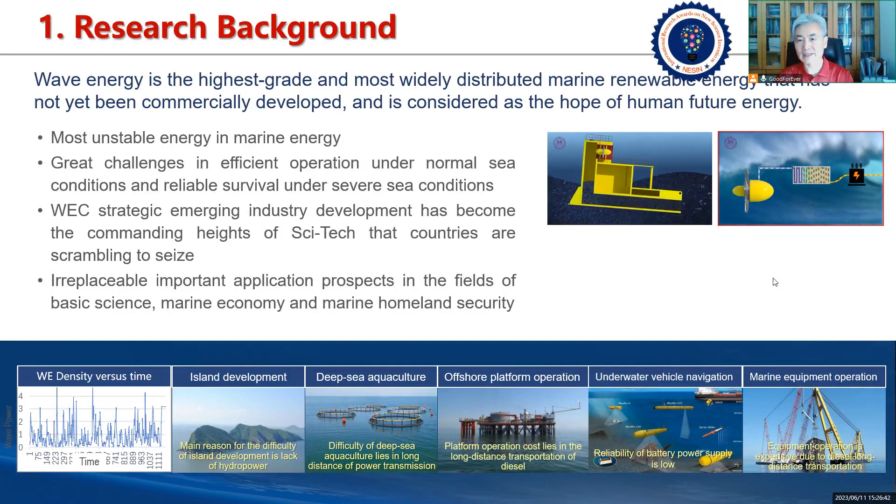The wave energy conversion system faces great challenges in efficient operation under normal sea conditions and reliable survival under severe sea conditions. The development of its strategic emerging industries has become the commanding heights of science and technology that coastal countries are scrambling to seize. It has irreplaceable important application prospects in the fields of basic science, marine economy, and marine homeland security.

The research on wave energy power generation technology has a history of nearly 100 years. Especially in the past 30 years, wave energy utilization technology has rapidly developed, and hundreds of structure types of wave energy conversion devices have been presented. These devices have been applied for grid connection or independent power generation. Here are the 12 most representative wave energy conversion devices in the world.

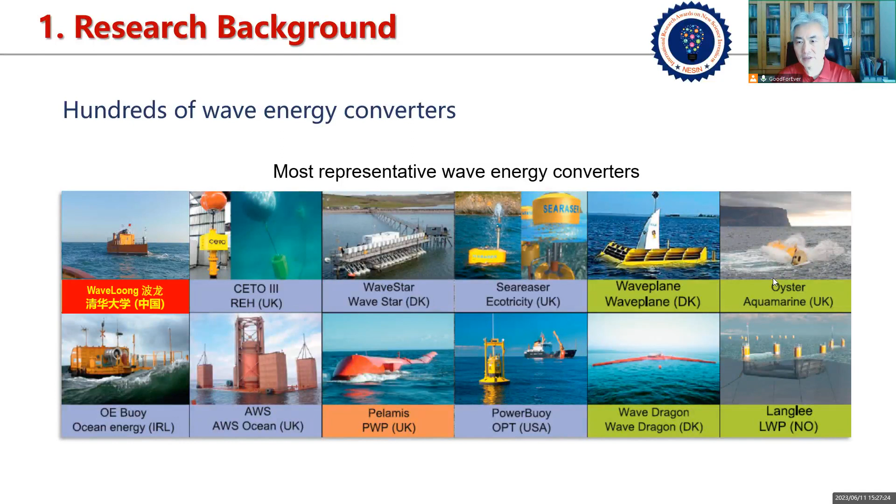These devices, according to their structure types, are mainly divided into oscillating water column type, point absorption type, pendulum type, raft type, and pressure difference type wave energy conversion devices. According to their energy transmission mode, they can be divided into pneumatic transmission and hydraulic transmission.

At present, wave energy power generation technology is still an emerging technology, and its main development trends are divided into two categories: pneumatic transmission and hydraulic transmission technology. Hydraulic transmission technology uses relative motion between the floating bodies and the supporting platforms to achieve wave energy conversion, which means that the devices are composed of at least two or more structural bodies, with large scale, high ocean engineering costs, high implementation difficulty, and poor reliability.

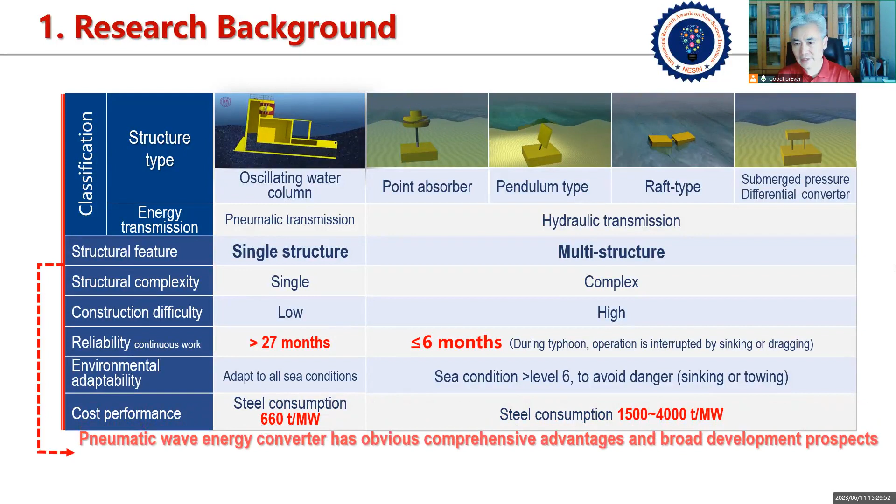This single floating device has been operating stably at sea for more than 2 years and has withstood the test of large waves, and its cost effectiveness is significantly higher than that of multi-structure devices. Therefore, the pneumatic wave energy converter has obvious comprehensive advantages and broad development prospects.

For the backward bent duct buoy oscillating water column pneumatic wave energy generation device, a fully coupled model theory from waves to electricity has not been established so far, making the mechanism of fluid-solid mechanical-electric interaction in the device unclear. Additionally, the efficiency of the air turbine in the device is not high enough and the survivability is not strong enough. These will be the problems we need to solve.

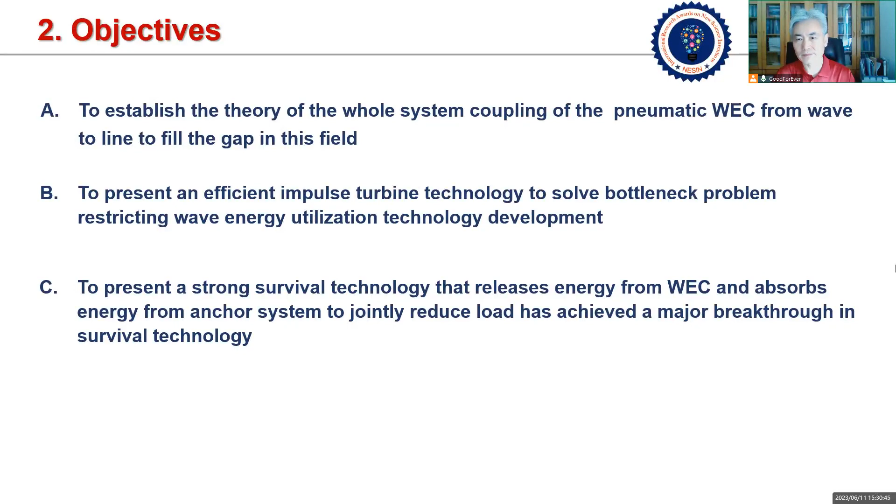3. Theory development for pneumatic wave energy converter. In response to the problems of frequent extreme typhoons, poor sea conditions, low wave frequencies, and large fluctuations, existing models are difficult to accurately simulate this kind of problem. The simulated results using the existing model will differ by up to 100% from the actual measured ones.

The common equations for fluid, structure, turbine, and generator motion are used to develop a fully coupled model of the backward bent duct buoy pneumatic wave energy conversion system from wave to electricity, to make up for the significant deficiencies in the theoretical errors of existing models, and to clarify the mechanism of fluid-solid mechanical-electric interaction in the entire system from waves to electricity.

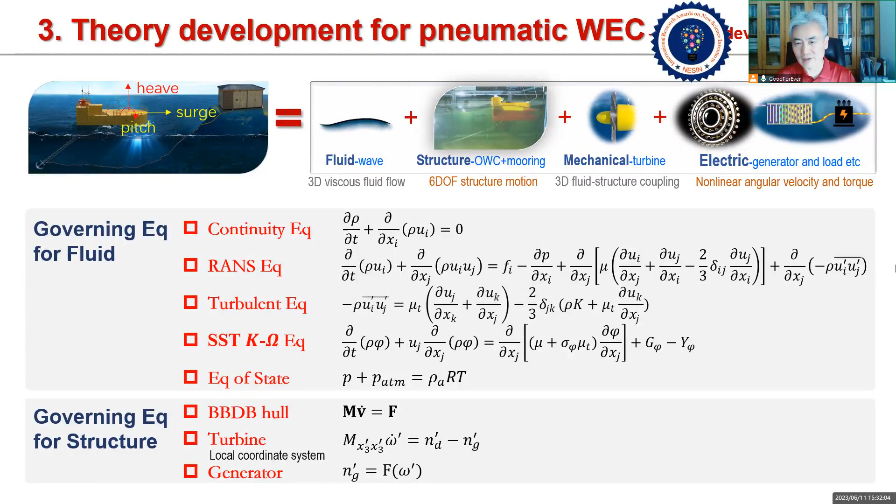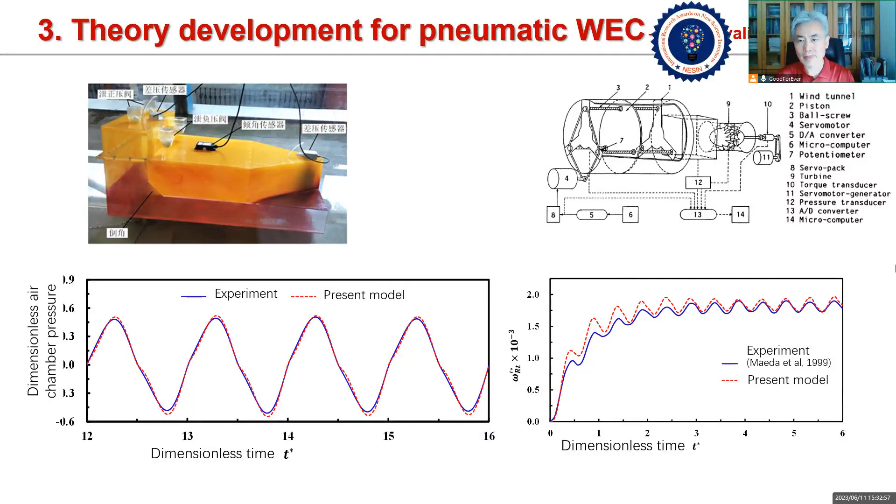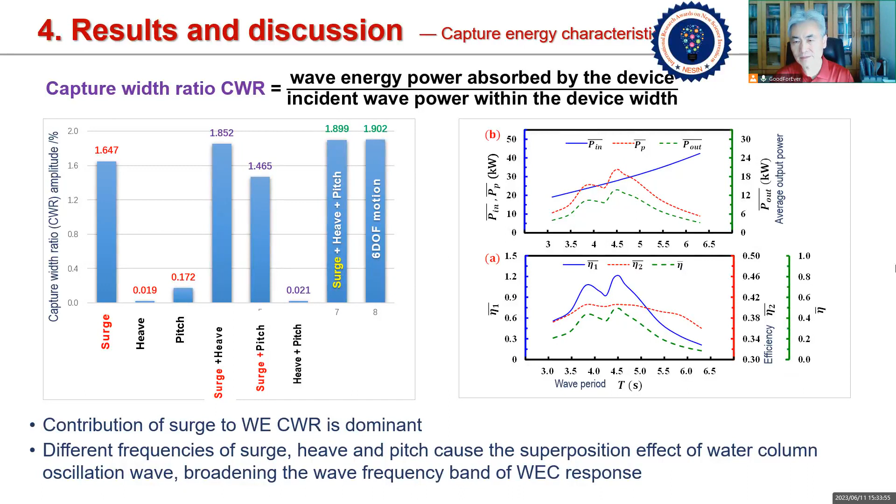The right-down figure shows the variation of the capture width ratio, turbine efficiency, and total device efficiency with wave period, which shows bimodal phenomena and the device's response, the wave frequency band becomes wider. Due to the difficulty in further improving the capture width ratio of the existing backward bent duct buoy oscillating water column pneumatic wave energy converter, bottom water pressure plate and ductile guide plate technologies are proposed.

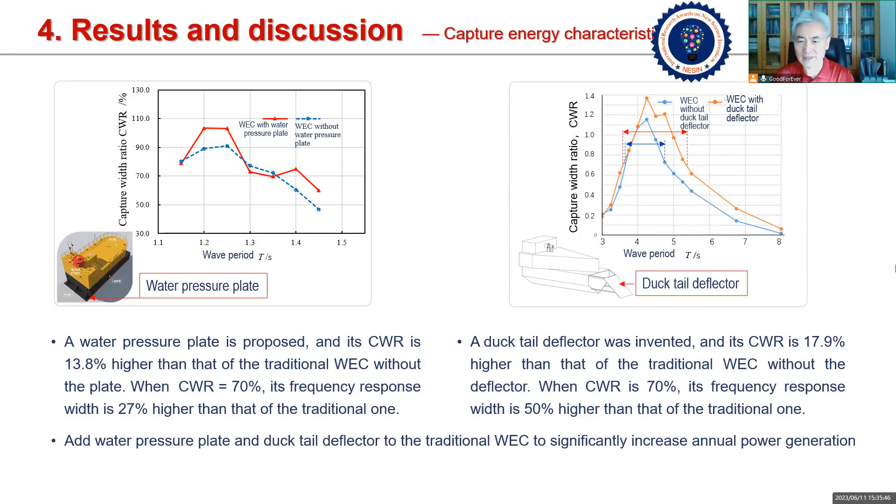that of the traditional one. The right figure shows the variation of capture width ratio with the period for the device equipped with a duck tail deflector. The capture width ratio of this proposed device with a duck tail deflector is increased by 17% compared to the traditional one. And when the capture width ratio is equal to 70%, the frequency response width of the proposed device is increased by 50% compared to the traditional one. The addition of water pressure plates and duck tail deflectors implies that the device can significantly increase annual power generation.

In order to effectively reduce the aerodynamic energy loss at the downstream row of guide wings, an impulse air turbine with fixed U-shaped flow channels and dual radial flow was invented, with an efficiency of 66%. The numerical results of transient simulation of the U-shaped impulse air turbine indicate the pressure and flow rate do not meet the quadratic relationship of existing theories, and the existing steady-state design theory overestimates the turbine efficiency.

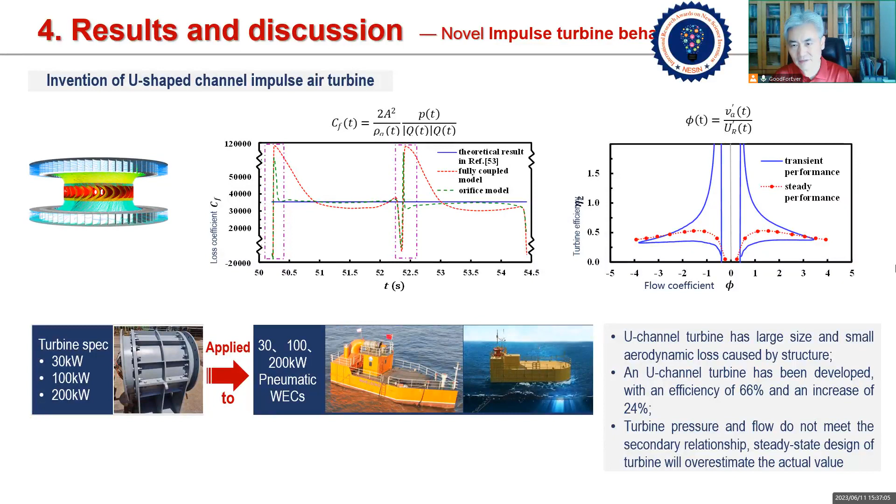The air turbine developed has been successfully applied to a 30 kW pneumatic wave energy conversion device and has been verified by offshore tests, which has solved the bottleneck problem of low efficiency of air turbines, which restricts the development of wave energy utilization technology.

The main factor affecting the survivability of the floating pneumatic wave energy generation device is the anchor chain load, and one of the main factors determining the anchor chain load is device load. However, with the existing device structure itself it is difficult to significantly reduce the device load under high sea conditions, and it is difficult to further improve the device survivability. The invented device automatically reduces the air chamber pressure to release the energy captured by a self-protection system.

In high sea conditions, the device can automatically release up to 96% of the energy captured by the device, and the device load is reduced by 86%. The laboratory scale and prototype test results show that the anchor chain load is reduced by 85%, realizing a major breakthrough in the survivability technology of the device and the anchor system, and ensuring that the offshore test device is safe in typhoons.

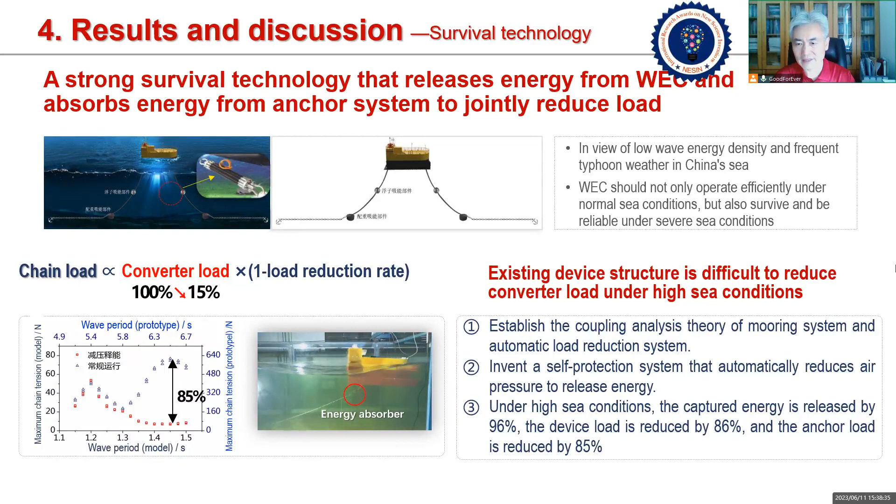4. Conclusions. Now let's summarize what we just talked about. The coupling model of the whole pneumatic wave energy conversion device from wave to electricity is established to fill the gap in this field. The capture width ratio increased from 90.9% to 103.3%, by 13.8%, by setting up a water pressure plate, while the capture width ratio increases from 117% to 138%, by 17.9%, by setting a duck tail deflector.

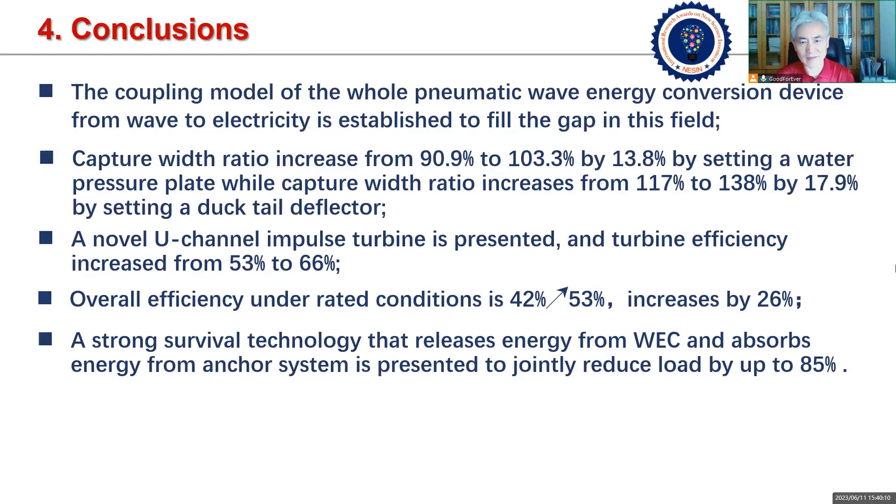A novel U-channel impulse turbine is presented, and the turbine efficiency increased from 53% to 66%. The overall efficiency under rated conditions went from 42% up to 53%, an increase of 26%. A strong survival technology that releases energy from the wave energy converter and absorbs energy from the anchor system is presented to jointly reduce load by up to 85%.